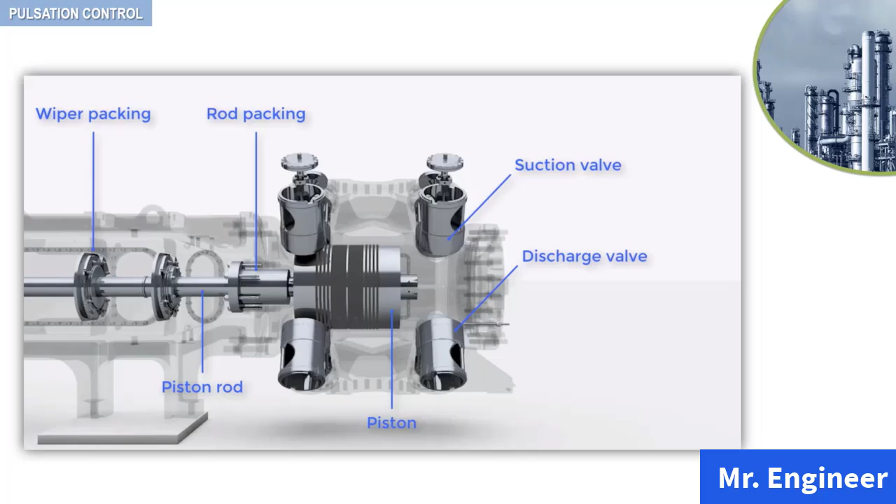The intermittent personality of the reciprocating compressor becomes evident when the subject of pulsations is broached. Take a look at the following 3D animation depicting the reciprocating motion of the piston.

Because discharge flow is interrupted while the piston is on the suction stroke, pressure pulses are superimposed on the discharge system's mean pressure. At the suction side of the system, the same type of interruption is going on, causing the suction pressure to take on a non-steady component.

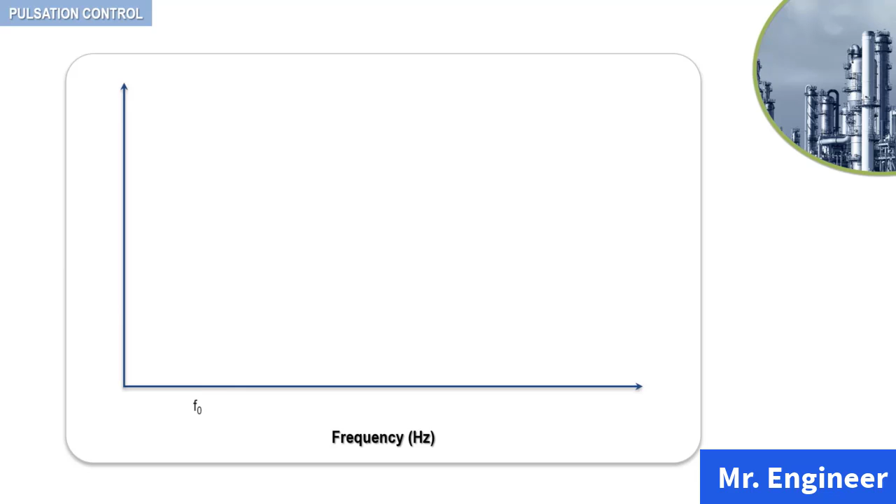The frequency of the pulses is constant when the speed is constant, which is the most normal condition for a reciprocating compressor. Now, if the frequency spectrum of the pulses is analyzed, it will be found to contain the fundamental frequency and a rich content of harmonics.

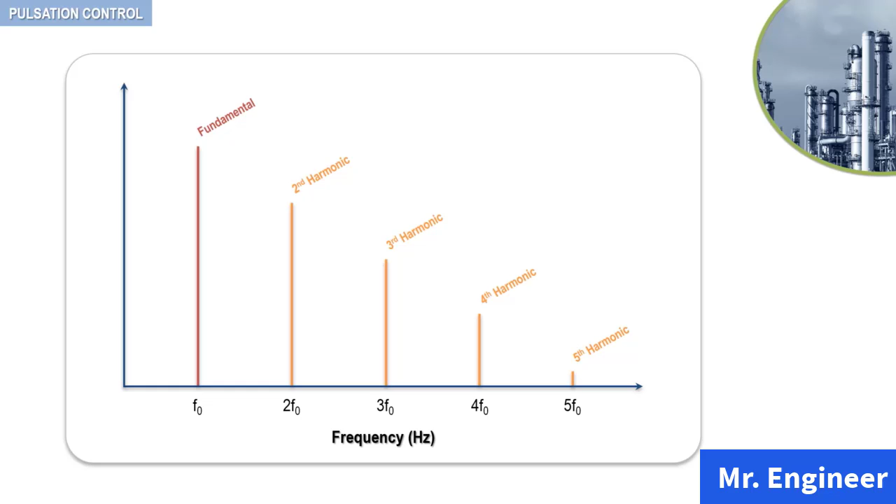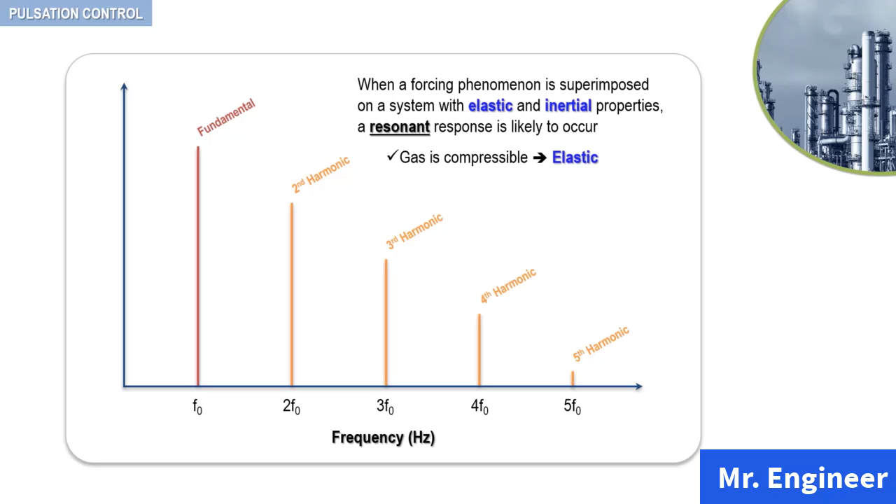Actually, when a forcing phenomenon is superimposed on a system with elastic and inertial properties, a resonant response is likely to occur. This is particularly true when the band of exciting frequencies is as broad as the type of system under consideration. The reciprocating compressor gas system meets this criteria. Why is that? Because gas is compressible, so elastic, and gas has inertia, which is its mass.

If left unchecked and a resonant response were to occur, the pressure peaks could easily reach a dangerous level. Because the oscillations are waves, standing waves will form, and interference with the valve action may occur, adversely affecting the cylinder performance.

While a single low-pressure compressor may require little or no treatment for pulsation control, the same machine with an increased gas density, pressure, or operational changes may develop a problem with pressure pulses. As an installation becomes more complex, such as with an increase in the number of cylinders connected to one header and the use of multiple stages, the possibility of a problem can increase.

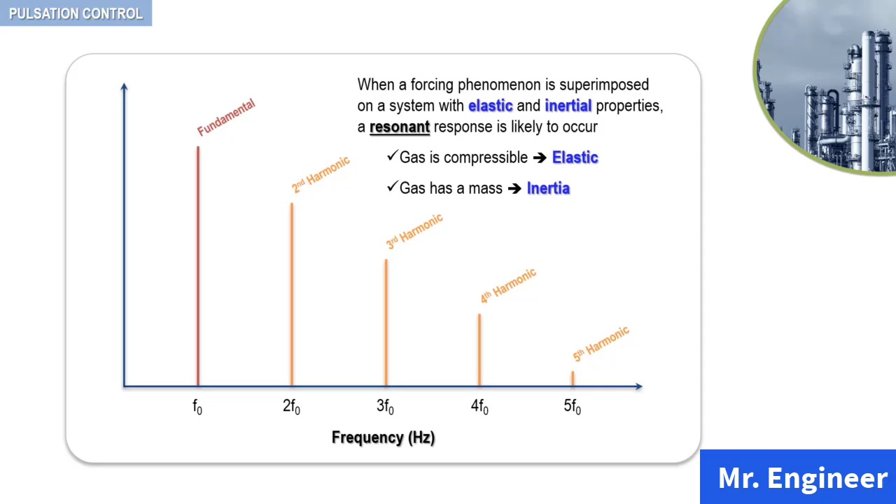When an installation is being planned, it is recommended that the API standard 618 be reviewed in exquisite detail. The pulsation level at the outlet side of any pulsation control device, regardless of type, should be no larger than 2% peak to peak of the line pressure, or the value given by the following equation, whichever is less.

In this equation, P% is the maximum allowable peak-to-peak pulsation level at any discrete frequency, as a percentage of average absolute pressure. P line is the average absolute line pressure. The objective of this approach is to improve the reliability of the system without having to design acoustical filters. For many systems, this is all that is needed.

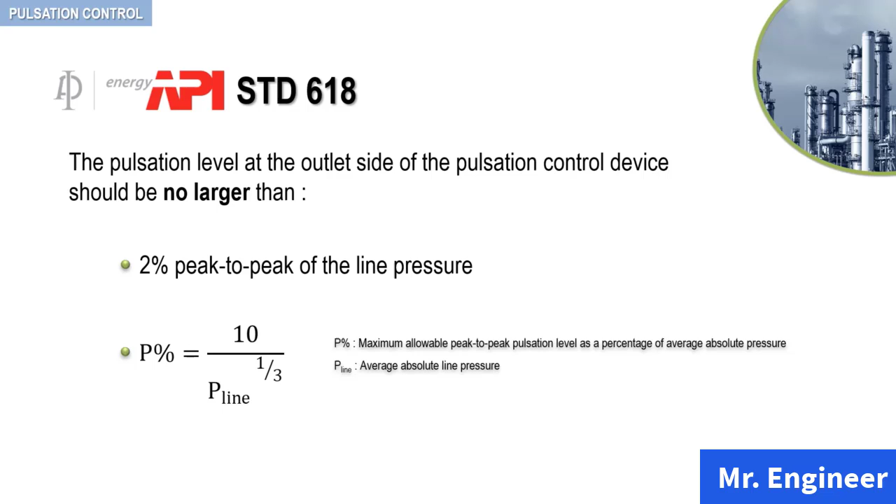API 618 contains a useful table that recommends the type of analysis that should be performed based on horsepower and pressure. This table is seen here and is also available in the downloadable resource section.

For example, if the horsepower of your compressor is below 75 horsepower and the discharge pressure falls between 1000 and 3000 psi, then the API 618 recommends that the second design approach, an acoustic simulation and piping restraint analysis, should be performed to assess the pulsation impacts and whether or not pulsation control elements will need to be incorporated.

Now, although these design methods are beyond the scope of this course, a couple of words though on the API standard.

The first design approach consists of an empirical pulsation suppression device sizing. This means that pulsation suppression devices are designed using proprietary or empirical techniques to meet line-side pulsation levels required in the API standard and the maximum pressure drop allowed in the same API standard based on the normal operating condition. Acoustic simulation analysis is not performed when using this design approach.

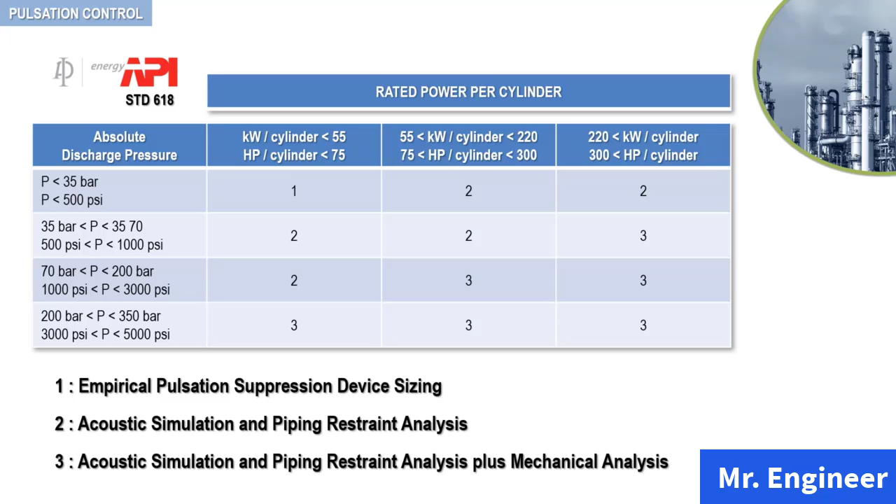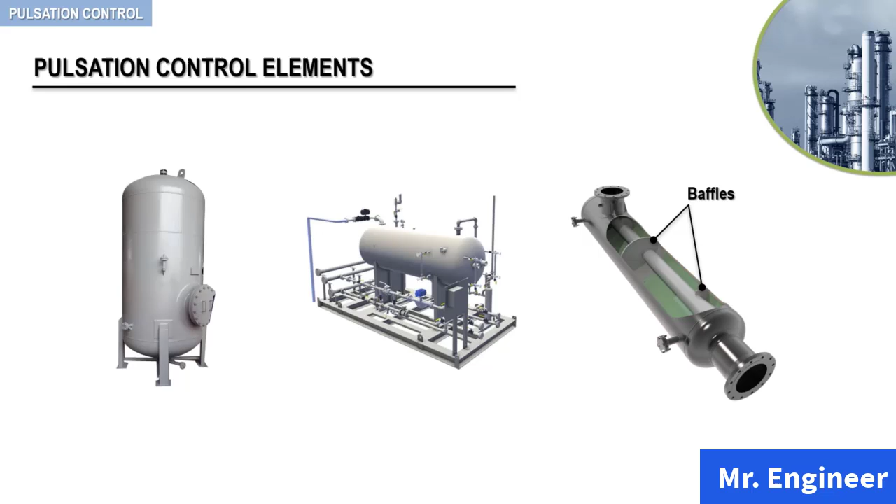Okay, now the pulsation control elements can have several forms, such as plain volume bottles with baffles, bottles and orifices, and proprietary acoustical filters. The following picture shows an example of a compressor with a set of attached volume bottles, as you can see here.

Regardless of which device or element is selected, a pressure loss evaluation must be made before the selection is finalized because each of these devices causes a pressure drop.

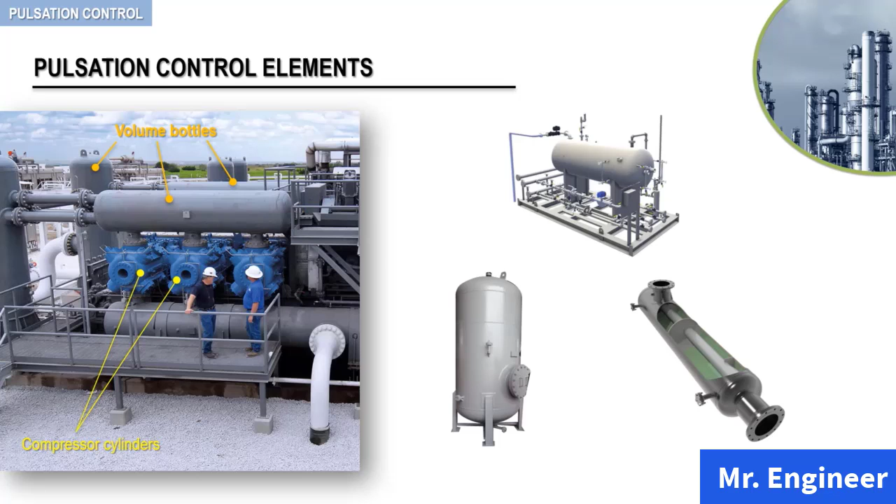For those compressor installations where a detailed pulsation analysis is required as per API standard, several consulting companies offer these services. Until the 1980s, the procedure used when a new installation was planned was to include the pulsation study in the contract with the compressor vendor.

During the pulsation study, piping isometrics were used to create a model of the piping connected to the compressor cylinders. A representative of the purchaser was required to be present for the study and had to be familiar with the piping requirements for the compressor area. This was necessary so that decisions relative to the space available, the location for the bottles, and the feasibility of piping modifications could be made during the study.

The representative helped to expedite the completion of a final configuration for the piping system and bottle location, since the components were disassembled after the study was completed. This method is still used, although much less frequently.

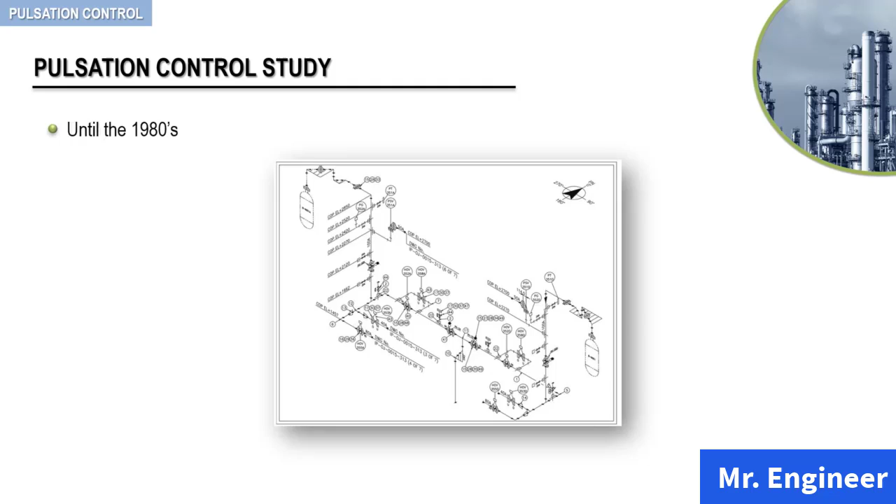Today, with the advent of modern workstations and faster desktop computers, the solution of the differential equations of motion for acoustical waves in piping systems has become feasible. In current practice, pulsation design studies using digital computer technology can produce the same results as those obtained with a dynamic simulation on the system. The results from digital simulation satisfy the requirement of the API standard.

An important advantage of this modern method is that digital computers have the capability of data file storage. With storage capability and the ability to readily manipulate the data, it is not as necessary to make immediate decisions. Piping changes that are recommended for acoustical control can be evaluated in a more comprehensive manner, taking into account safety, cost, maintenance, and operational considerations.

An important point to emphasize here is that interpretation of the results and the quality of the design from the pulsation study depends quite heavily on the experience and skill of the analyst performing the study. So, if you are seeking to purchase a new compressor for your facility and are a novice at this type of analysis, you should give serious consideration to using the services of a competent consultant.

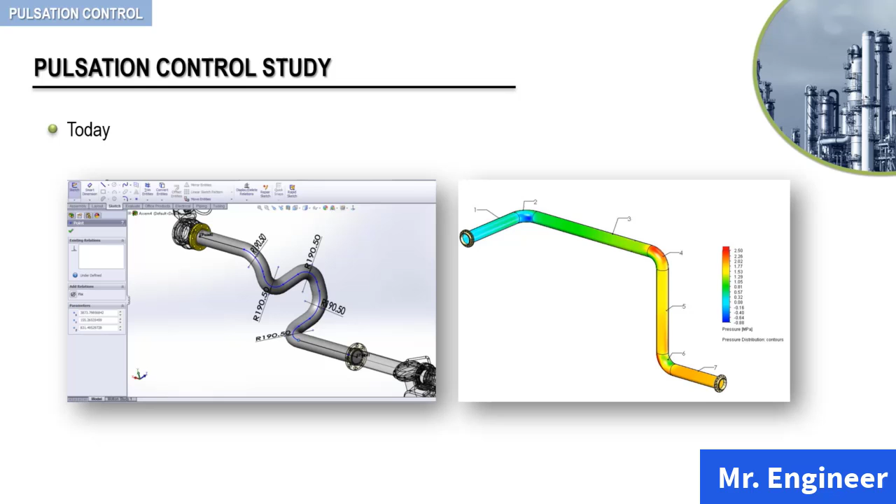For quick estimates or field evaluation of existing systems, you can consider the following curve. This curve is not meant to supersede a comprehensive analysis as previously discussed. It should be used in checking vendor proposals or in revising existing installations where a single cylinder is connected to a header without the interaction of multiple cylinders. Think of this useful chart as a quick rule of thumb to size your compressor bottles or to check your vendor proposal. The curve should be conservative for compressors under 1000 psi and 500 horsepower.

The volume bottle defined is of the simple unbaffled type, as seen here. This chart gives the volume size multiplier as a function of the volumetric efficiency for a single or double-acting cylinder.

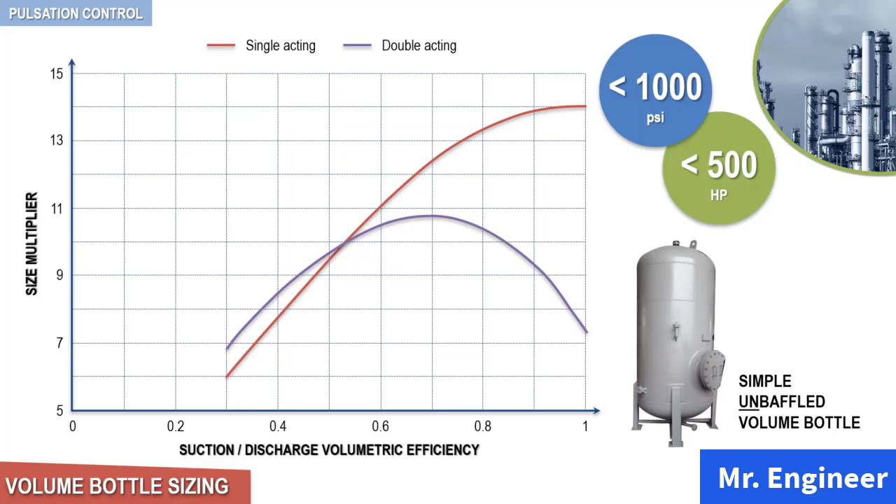To calculate the discharge volumetric efficiency, you can use the following equation. To calculate the suction volumetric efficiency, you can use this second equation. Recall, these two equations were discussed in a previous video. Once the inlet and discharge volumetric efficiencies are determined, volume bottles for the inlet and discharge may be sized.

First, begin the process of sizing the bottle of interest using the appropriate volumetric efficiency, and then determine the corresponding size multiplier from the chart. For example, for a single acting cylinder, a volumetric efficiency of 0.8 will yield a size multiplier of 13.3, as depicted here.

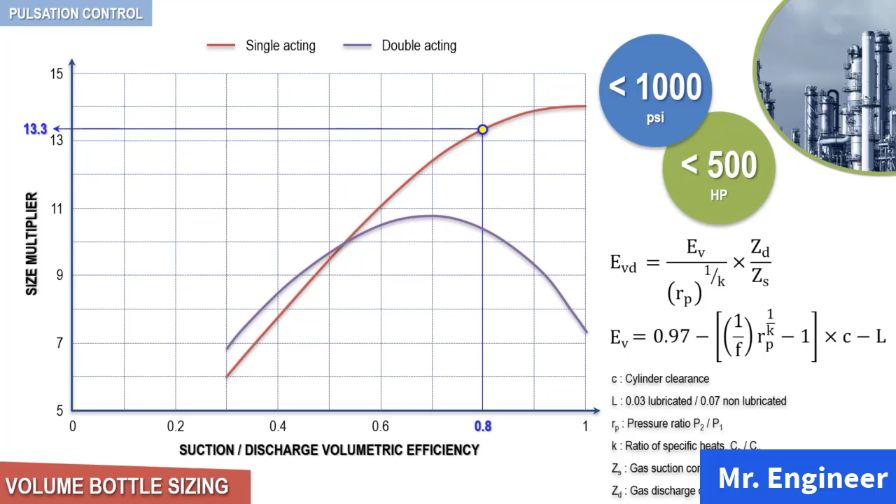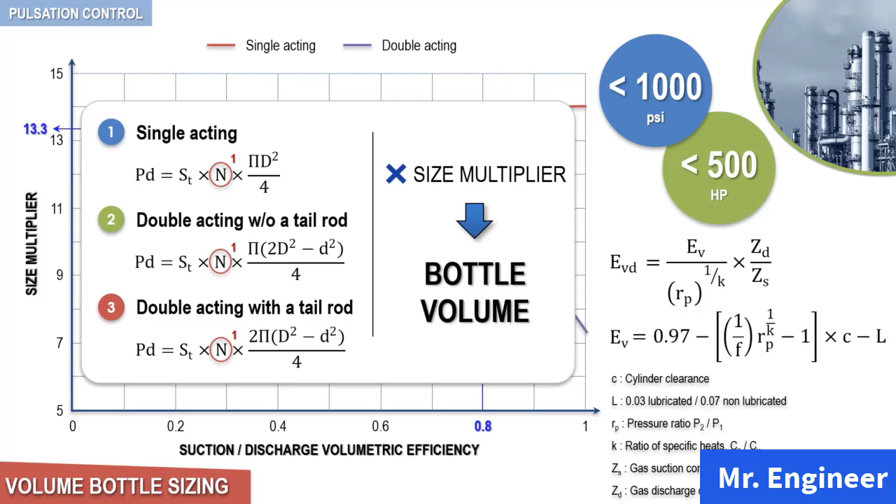Next, use one of the following equations to determine the piston displacement. Recall, these equations were discussed in a previous section. Here, in the calculation, use 1 for the speed in N to determine the piston displacement for a single revolution. Next, apply the multiplier to the piston displacement per revolution. The product is the bottle volume. This volume can then be used in the next equation that you can see here to calculate the bottle diameter.

Finally, to complete the solution for the volume bottle dimensions, you can assume 2 to 1 elliptical heads and use the following relationship to calculate the length of the bottle.

The next video is a practice session where we will use the methodology developed here to size suction and discharge volume bottles for a given single-acting reciprocating compressor.

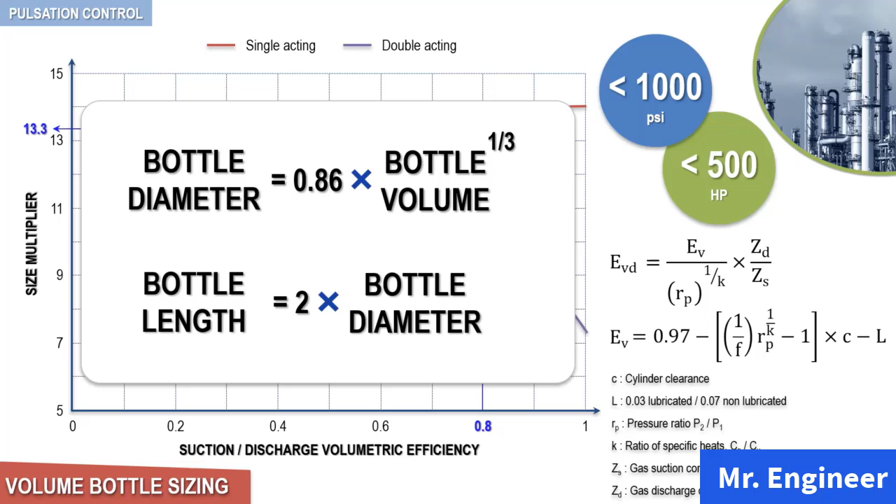In this practice session, we will approximate the size of a suction and a discharge volume bottle for a single-stage, single-acting, lubricated reciprocating compressor. The objective is to minimize the effect of pulsation by using a pulsation control element, which in our case is a simple unbaffled volume bottle. So let's have a closer look.

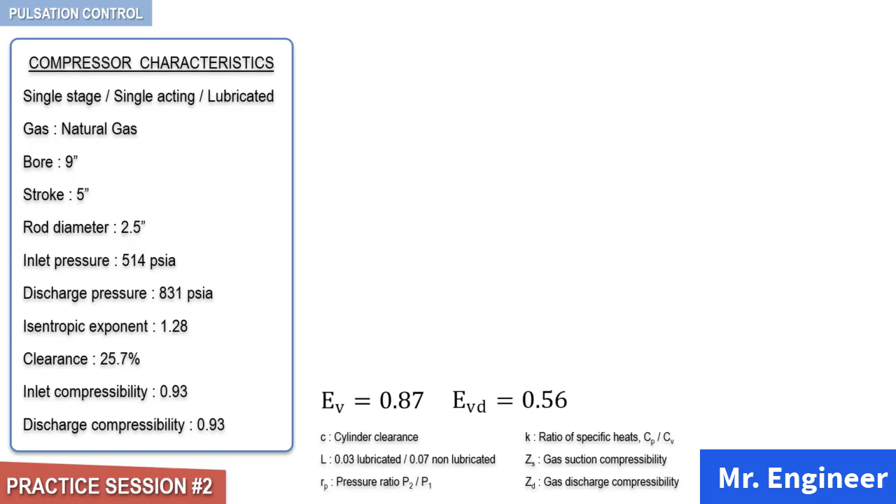Next, we need to find the total volume displaced per revolution, then multiply it by the size multiplier, which we will determine graphically in order to calculate the volume of the bottle. In our case, we have a single acting compressor, so the equation that applies is equation number 1. Substituting for the known values and using 1 for the speed in N, we find the value of the piston displacement for one revolution as seen here.

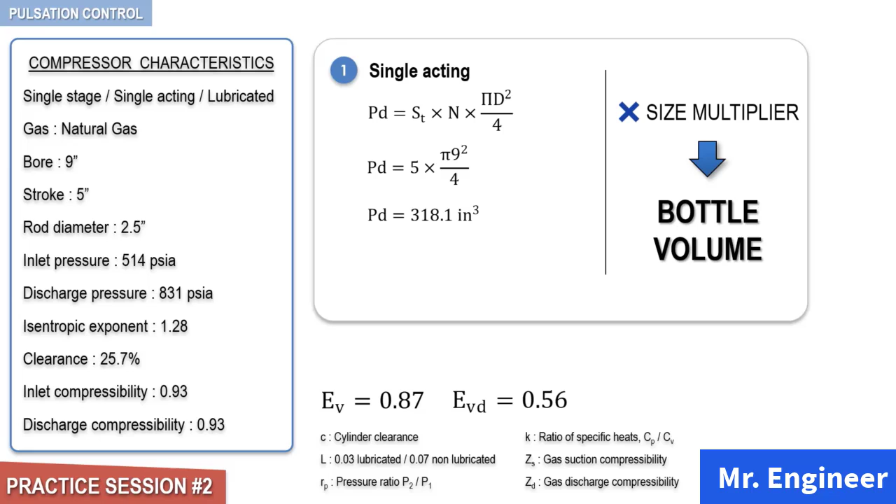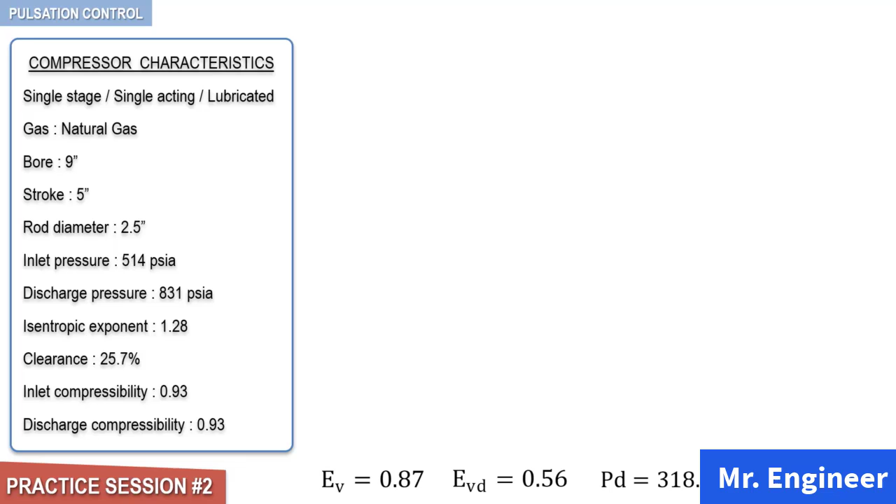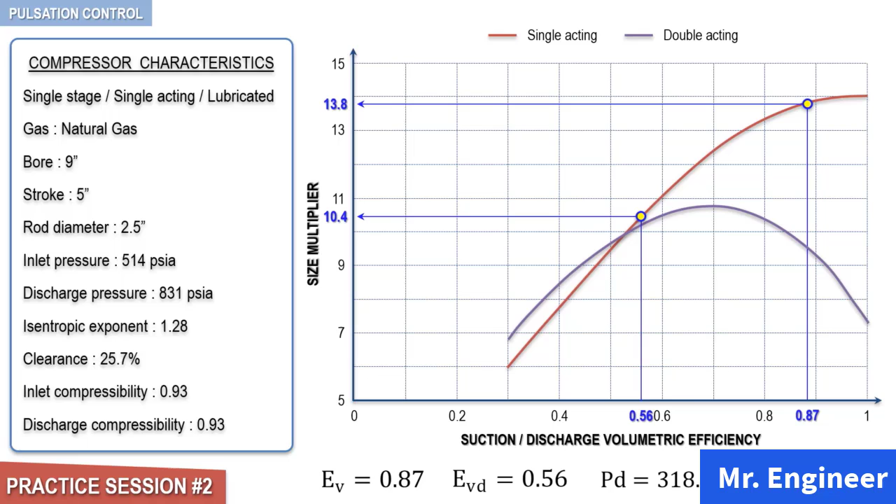Next, using the volumetric efficiencies, we will determine the size multiplier from the volume bottle sizing chart. As you can see here, the suction multiplier is 13.8 and the discharge multiplier is 10.4. The suction and discharge volumes can then be calculated using the following equations.